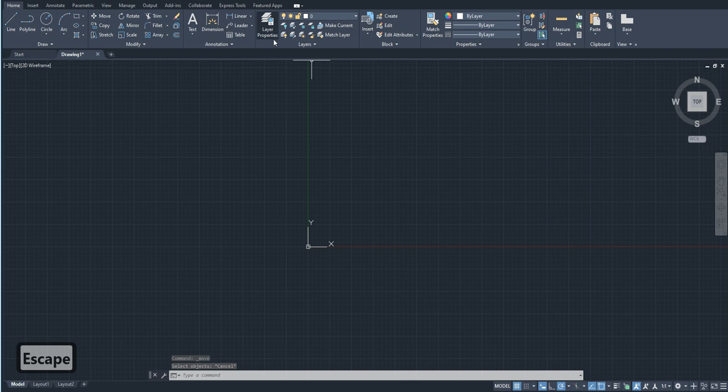To show you the first command, Move, I'll just create a random object on screen. Say I have this object and I want to move it. What you can do is select this command from here, or enter the command using the keyboard: Move. It's asking me to select the objects. I select them and press Enter or spacebar.

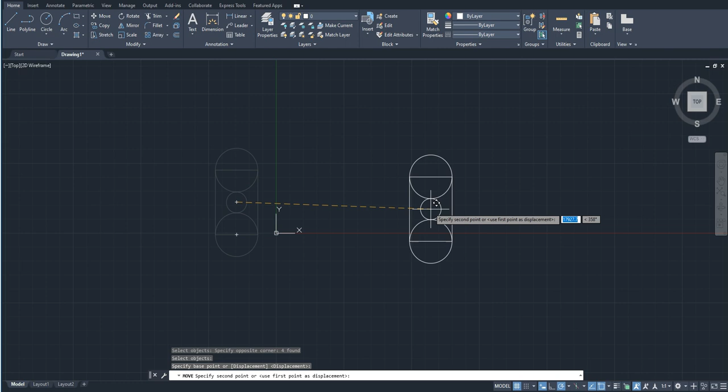AutoCAD assigns a similar function to spacebar and enter, so you can use either. I personally prefer the spacebar, so I press spacebar and it's asking me to specify the base point. Say I specify the base point as the center of this whole figure, and I can move the object wherever I want. So this is the command Move.

Just press Escape to end the command.

The next is the command Copy. It's pretty similar to Move. I select it from here, or enter it, select the objects, press Enter, and specify the base point. The only difference between Move and Copy is that Copy retains the original object, so you can copy this object as many times as you want.

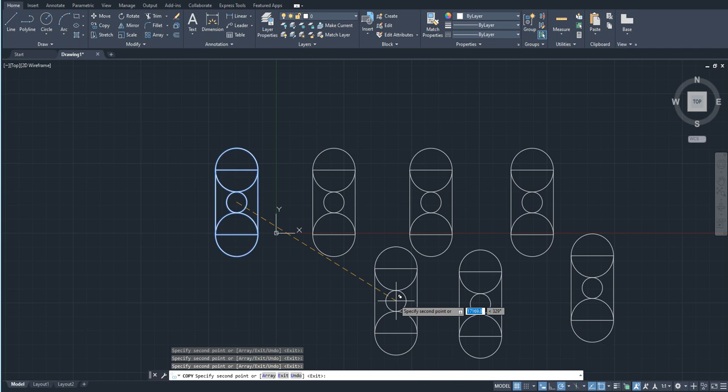I'm just going to press Ctrl+Z. Now I'm going to show you another use of the Copy command. I activate the Copy command again, select this object, and press Enter.

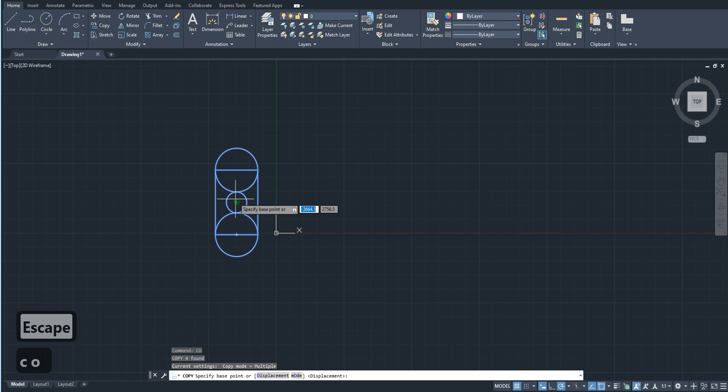And I'm going to show you the command Array. First, I'm going to specify the base point. I'm sorry, I messed that up. I'll use the command Copy and specify the base point. Now I'm going to start the command Array. It's asking me: copy, specify second point, or array.

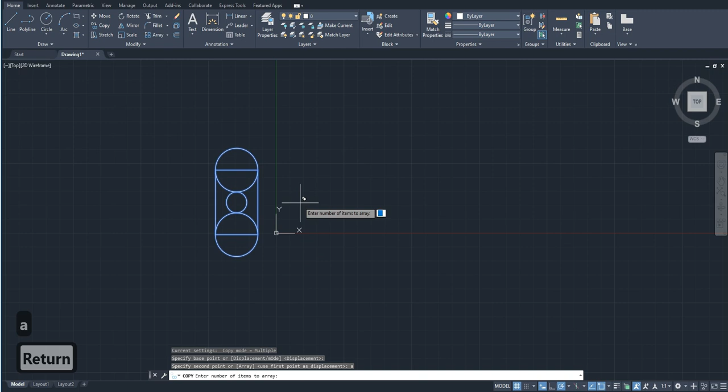So I'm going to show you what this Array command means. For that, I just press Enter. It's asking me the number of items to array. Suppose I want 5 different copies of this particular object. I'm going to enter the number 5.

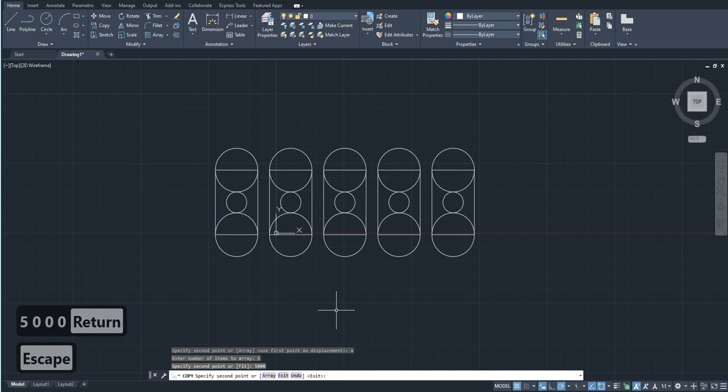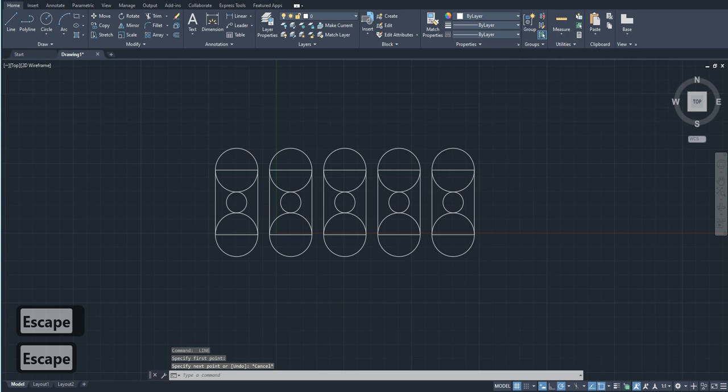So you see 5 different objects have appeared. The fascinating thing is that the distance between these objects remains the same, which I can enter manually as, say, 5000. So we have the copy of the same object 5 times, equally distanced as 5000. You see the distances between the base points - for example, between these were the 2 base points of the object, so the distance between the base points is 5000, not the distance between the lines. That's how the Array command works in Copy.

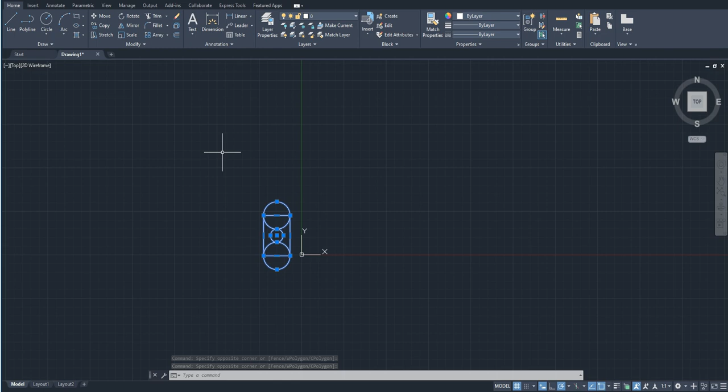The next thing I'm going to teach you is the command Rotate. You can either select the object first and then select the command, or select the command and then select the object - it works either way. So I selected the objects first which I want to rotate, then clicked the Rotate command.

It's asking me to specify the base point, say this, and you see I can rotate this object however I want. Say I rotated it to this. Now I want to make it horizontal again. Of course I can use Ctrl+Z, but suppose I want to make this particular line horizontal in this object - how do I do that?

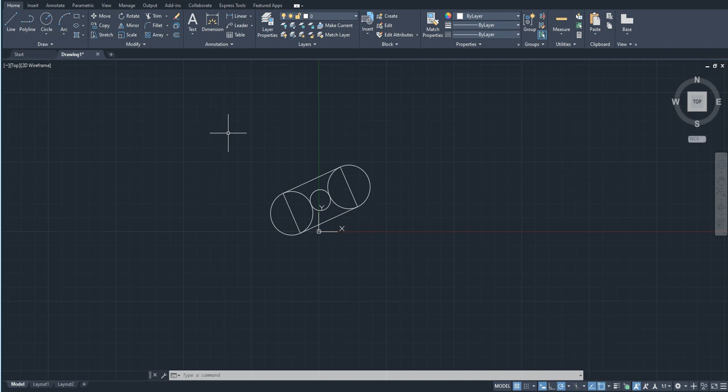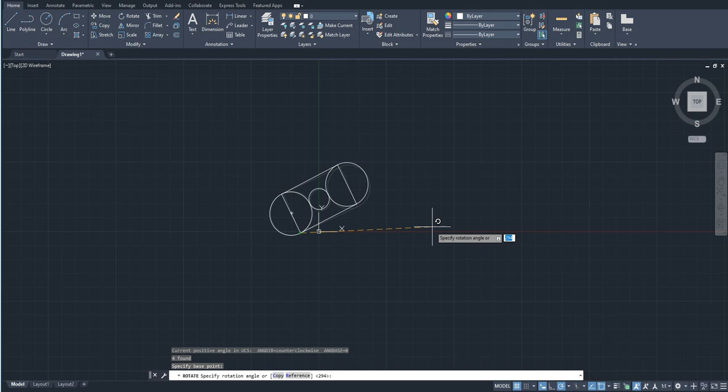Using the command Rotate, I select this, enter the command Rotate, select this base point. You see, no matter how hard I try, the polar tracking isn't working, because this object is rotated on a different axis. So now I'm just going to have to enter a reference line.

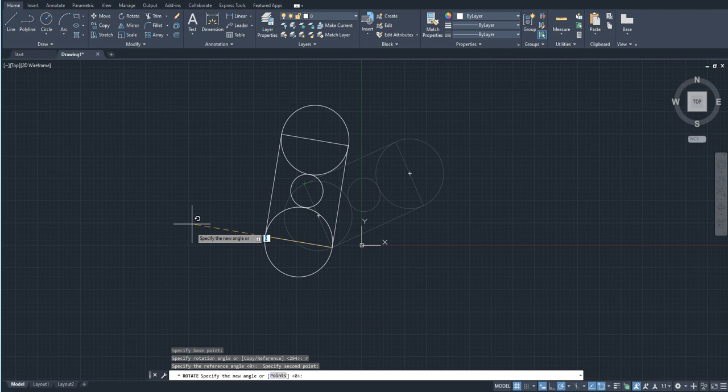For that, you just press R and press Enter. It's asking me to specify a reference angle. Say I specify the reference angle as this. Now I can rotate my object according to this line, and now we have the object finally horizontal. That's how the Rotate command works.

The next command I'm going to show you is the Offset command.

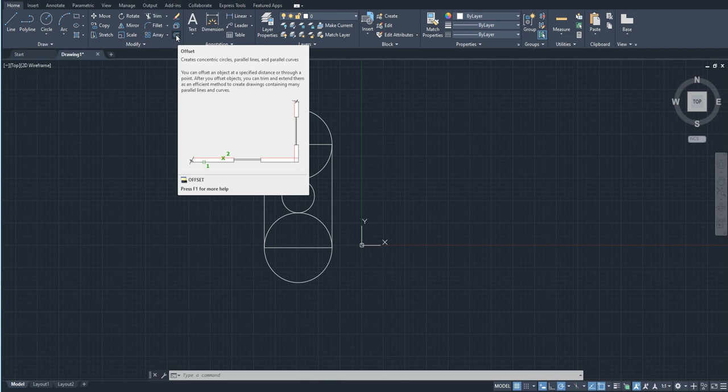The offset command is this small icon over here. This is my favorite command, I use it a lot. It helps to create concentric circles, parallel lines, and parallel curves.

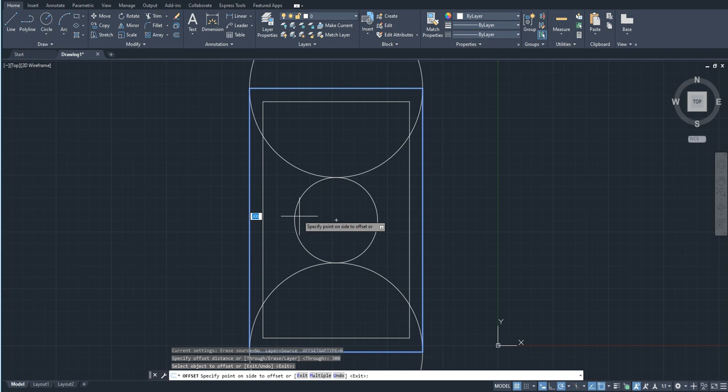So I'm just going to select this, and it helps to create an offset. Say I want a similar rectangle inside this rectangle at a distance of say 300. So I specify the offset distance as 300 and press enter. Now if I select this object and hover my mouse inside this, another object appears at a distance of 300 from the original one.

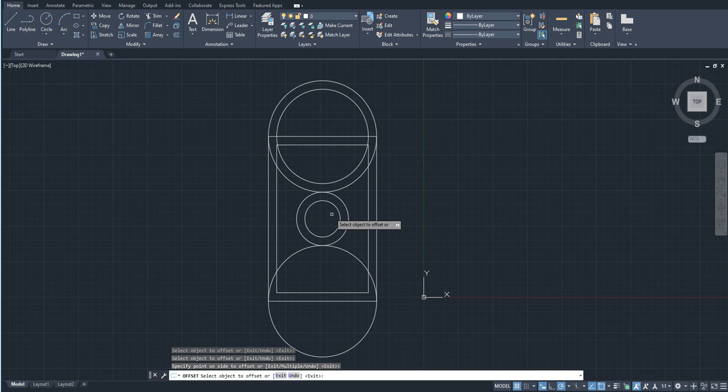And if I hover the mouse outside this object, it's going to offset towards the outside. So I can offset rectangles, circles, and basically anything. I can even offset lines, for example this particular line. If I use the offset command on this, we can also offset lines over here. I can offset it as many times as I want.

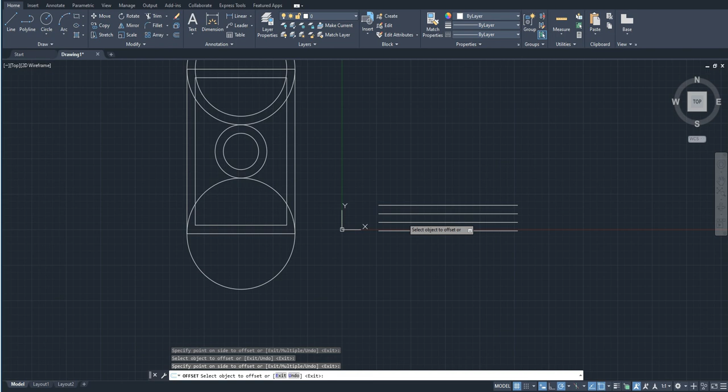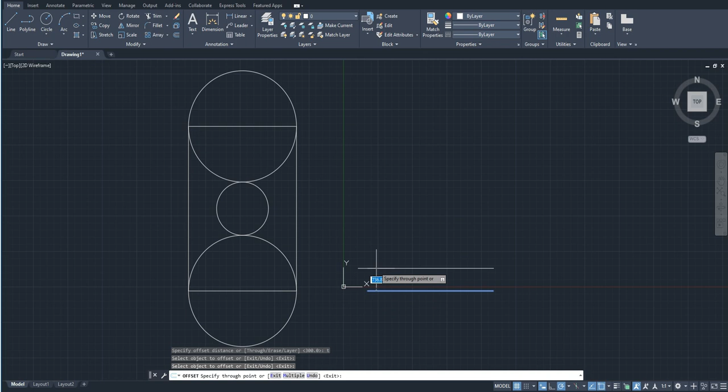The second thing I'm going to show you about the offset command is the 'through' option. For example, I have a line parallel to this particular line, and I enter the offset command, and specify the offset distance as 'through'. For that, I just enter T, enter, and it asks me to specify the object, say this. Now I can select the object and specify the distance on my own, like this. So this is another use of the offset command, called through. That's all about the offset command.

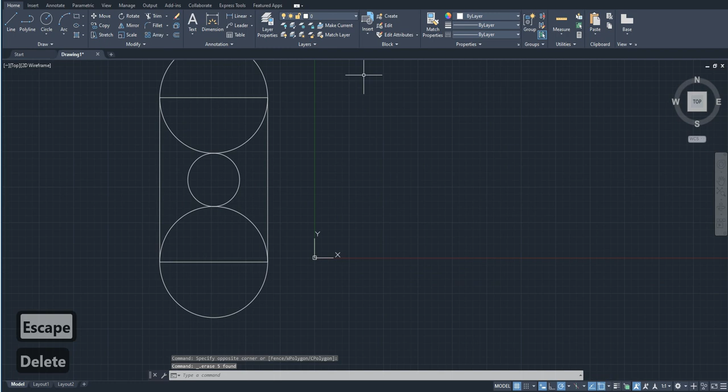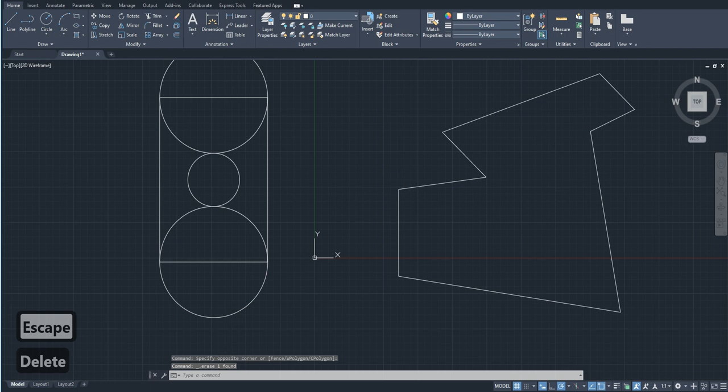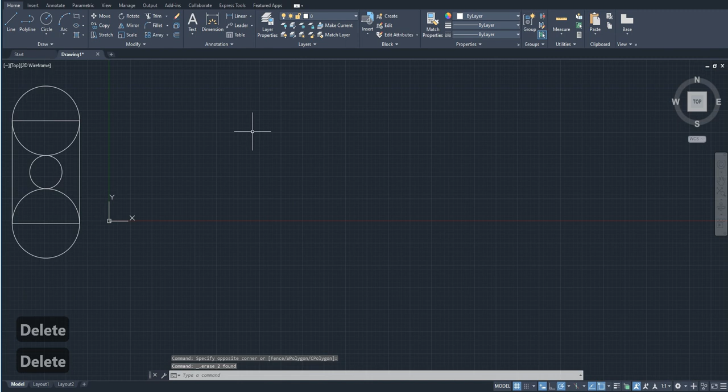The next thing I'm going to tell you about is polylines. We already discussed polylines, I just entered the command for that, PLINE. The offset command also works for polylines, and likewise it works for basically any object. But say this line is not a polyline, these are different lines. For example, I make a similar shape using lines, and then try to offset this - I'm going to have to offset it one by one. So make sure that whatever object you're offsetting, if you want the complete offset of that object, it has to be a polyline or one singular object. That's only when the offset command works that way.

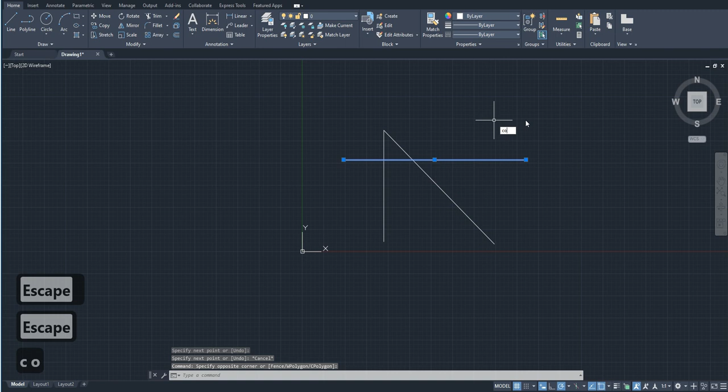The next thing I'm going to show you is the command trim. Let me just draw a figure. Let's say I want to trim these 3 lines, and I'm going to do it in one go instead of selecting this, then clicking this point, end point, and putting it here - that would be a tedious process. So instead I'm just going to use the command trim. For that you can either click the command trim, or just enter TR, enter.

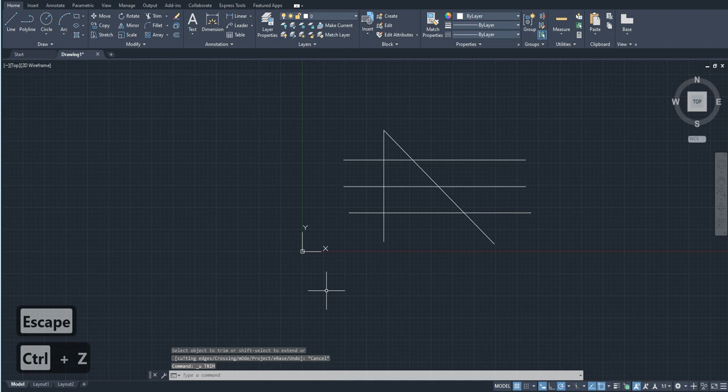Now my version of AutoCAD is AutoCAD 2022. If you're using versions below 2021, you're going to just have to wait a little bit. For people using AutoCAD 2021 and above, they can simply trim this using these commands - you can hover over the lines and it's going to trim them for you. For people using AutoCAD below 2021, don't fret, I'm just going to enter the command TR, enter. For previous versions, if you just enter T, enter, that's how they work.

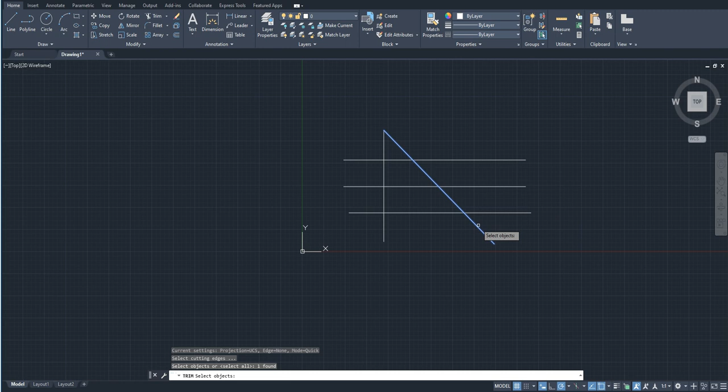If you just enter the trim command, it's going to work like this. Say you're going to have to select this object and these objects - the object from which you want to trim, and the objects you want to trim. So I'm just going to select these 3 objects, press spacebar again, and then trim these objects. That's how trim in earlier AutoCAD versions works.

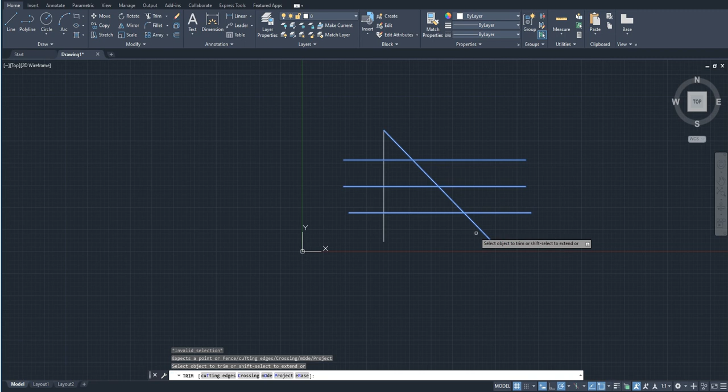But I'm going to show you another useful thing the earlier version has. For example, I want to trim these particular lines over here, not these lines but the whole line. So I'm going to select the line from which I have to trim and the lines which are to be trimmed - I'm not going to select this particular line. Now I just use this command, and you see, I don't have to trim this side and this side separately - it just trimmed the whole thing on its own, and didn't consider this particular line while trimming. That's the advantage of previous versions. So that's how the trim command works.

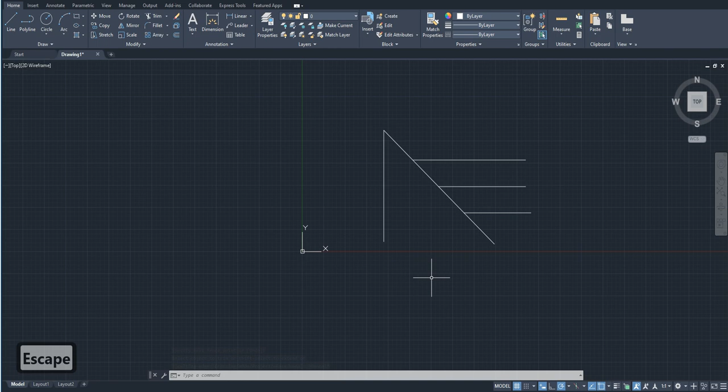The second thing I'm going to teach you is the command extend. For that you just select this, or use the command extend from here. It's asking me to select the objects to extend. I select these objects and extend them to this particular line. That's how the command extend works.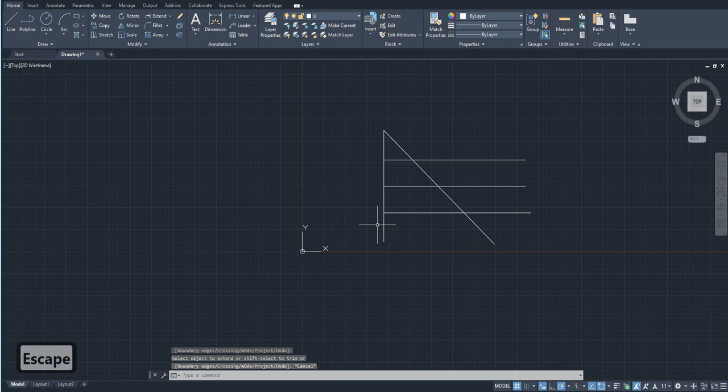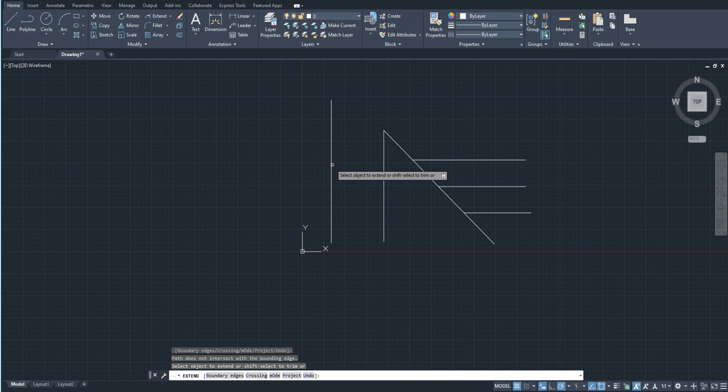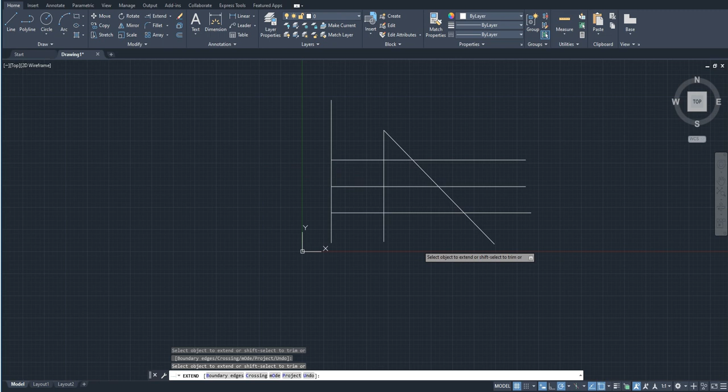I'm just going to press Ctrl+Z to show you another application. Suppose I want these lines to extend till over here. For that I select these lines, use the command extend, and select the object. I select these lines, use the command extend, and select the object like this while double pressing it. So that's for the trim, and that's how the extend command works.

I think it's fairly easy. The next command I'm going to teach you is the command mirror. For that I'm just going to draw a random object, which is a rectangle, and another rectangle and a line.

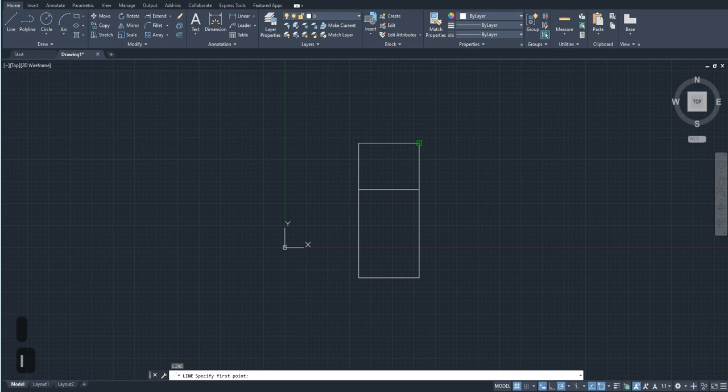Say I have this particular object and I want a symmetrical copy of this object. I don't want a copy, I want a symmetrical copy, basically a mirror image of this object. For that I just have to select this object and click on the command mirror over here. It's asking me to specify the first point of the mirror line.

Now if you remember, when you're standing, say, 5 centimeters away from the mirror, the distance of your reflection from you is going to be 10 centimeters. So if I want the distance between this object and its mirror object to be, say, 5 units, the distance of the mirror line has to be 2.5 from here.

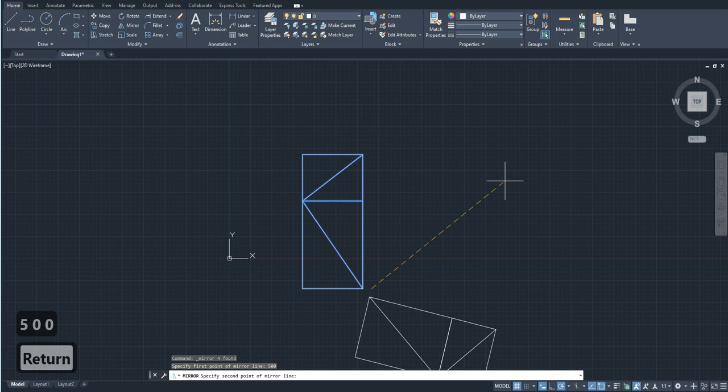Say I want the distance to be 1,000 units, the distance of the mirror line from this object has to be 500 units. So for that, I'm just going to hover my mouse over this area and type 500, press enter, and you see the mirror line can be in different directions. It's going in all sorts of different directions.

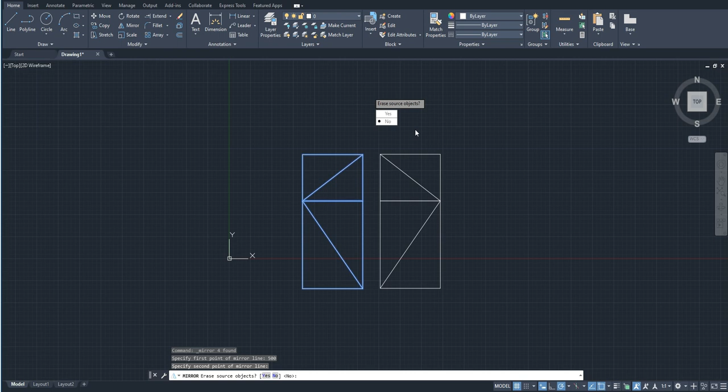I want it to be vertical like this, and it's asking me whether to erase the source objects. I just press enter because no has already been selected by default. So I just press enter, and that's how the command mirror works. So you just have to imagine that you're placing a mirror in front of an object.

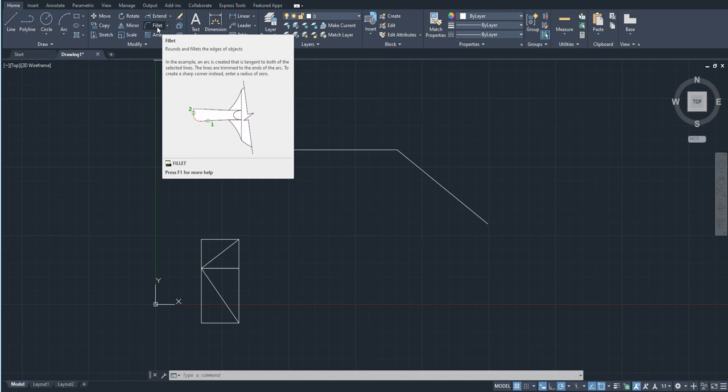The second thing that I'm going to be teaching you is the command fillet. So for that, I'm going to be drawing two different objects. For example, this particular line. I'll just show you what the command fillet does. Fillet rounds and fillets the edges of objects. So it's basically going to change the edge of the object to a round thing.

So I'll just select this command. It's asking me to select the first object, and it's asking me to select the second object. If I zoom in, you can see it did nothing, but that doesn't mean the command didn't work. It's basically because we didn't enter any radius while filleting the object.

So if I use the command fillet again, select my first object, and you can see over here, select second object or radius. If I just enter the radius to be, say, 500, and then I select my second object, you see a curve has appeared over here.

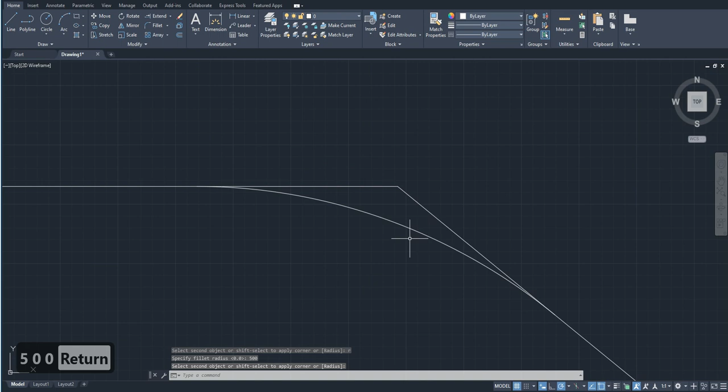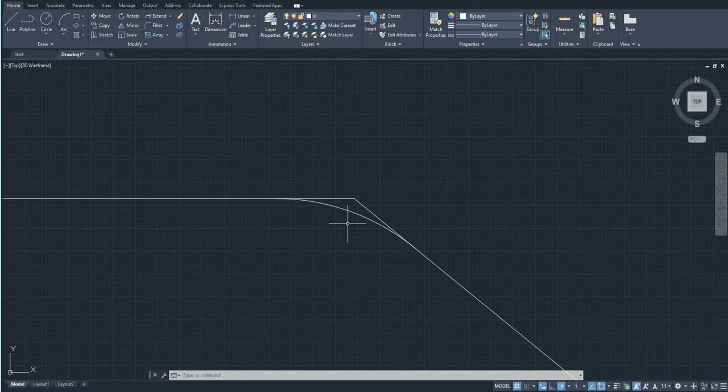Now suppose while creating this curved object, I wanted this particular line to be gone. I only wanted the edges of this object to be rounded. So for that, I'm going to erase this particular arc, and I enter the command fillet again. This time you can see that there are 4 different options over here: polyline, radius, trim, and multiple. For now, I'm going to use trim.

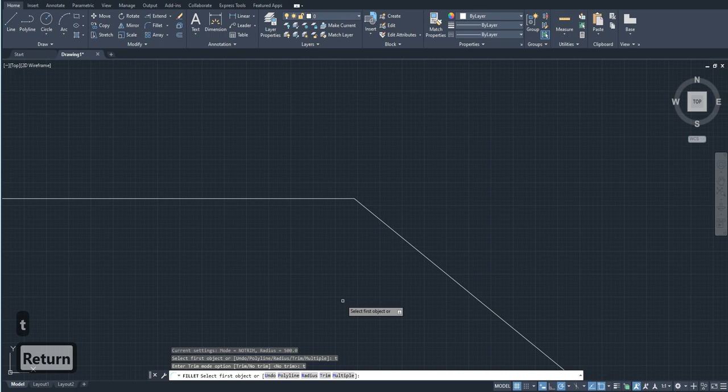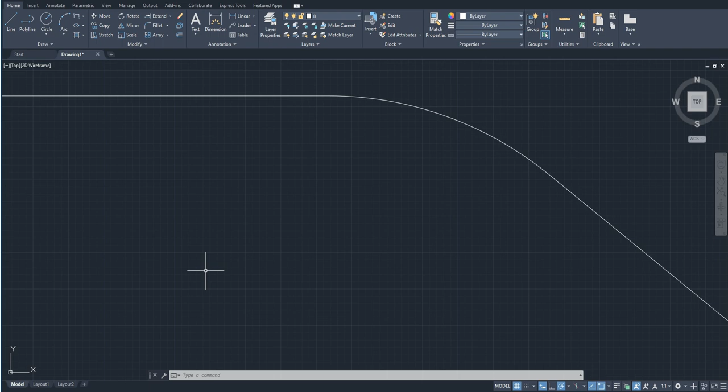So it's asking me to enter trim mode. If I enter T and enter, let's see what that does. I select the first object and I select the second object. You see the corner that was appearing, it's gone now. So that's how the trim command works. Some people may already have no trim activated. So just press Ctrl+Z again, and I'll show you other things of the fillet command.

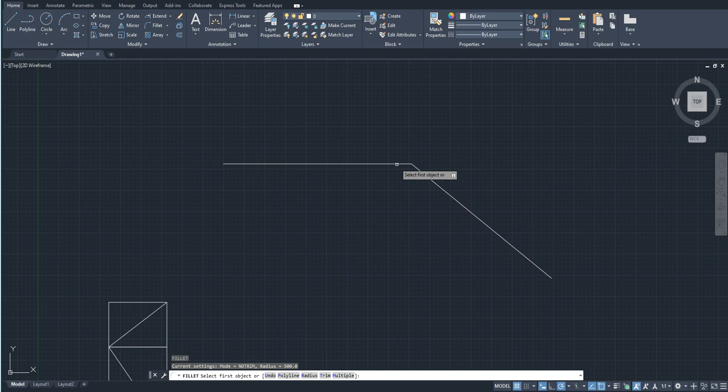I just enter F, enter, and it's asking me multiple. Say I have this particular corner and I have these corners. I want to change the shape of all these corners. So I just enter M, enter, and I select these objects. I keep selecting them and they're going to change their corners.

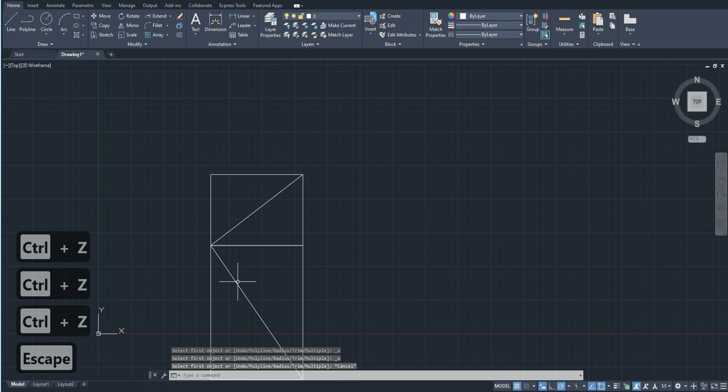But to do this very quickly, I had this as a polyline. This particular thing is a polyline, and so is this particular object. So to do this a bit quickly, I'm going to enter fillet, and this time I'm going to use polyline. So if I just select the polyline, that's what it's going to do. It just created corners over this polyline.

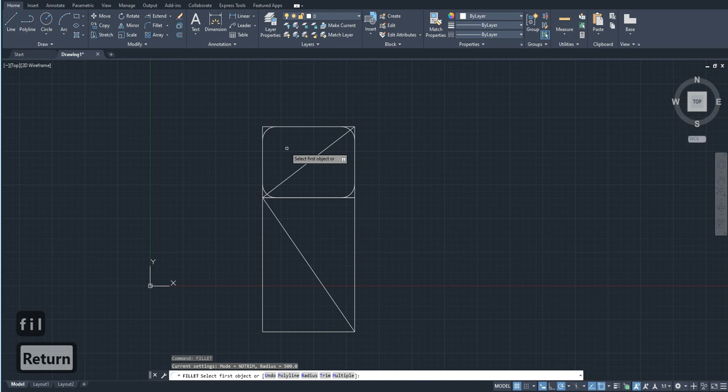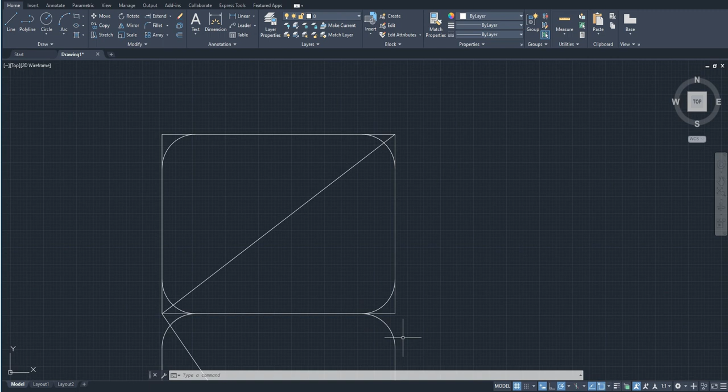Well, if I have the trim command activated in this, T enter, trim, and I activate polyline after that, if I select this, all of this is going to be a polyline. Even the corners, the rounded arcs, have become a polyline. Instead, if we have no trim activated, the arcs are different and this line is different. So I hope you understood what the fillet command does.

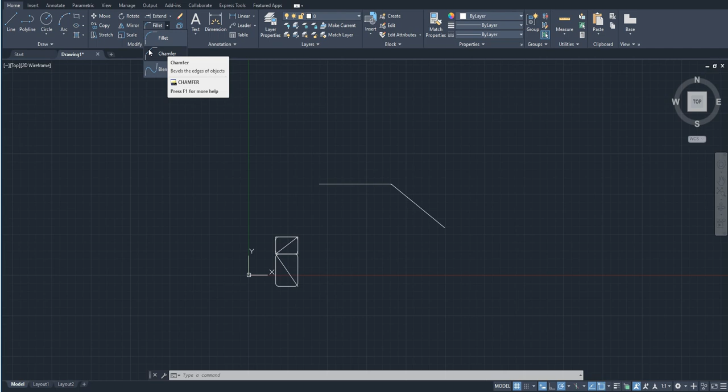Next, I'm going to be showing you the chamfer command. The fillet command is similar to the chamfer command. In fillet, we have kind of an arc instead of a corner. In chamfer, there's a line instead of a corner. I'm just going to be showing you that. For that, I'm going to have to delete all these lines.

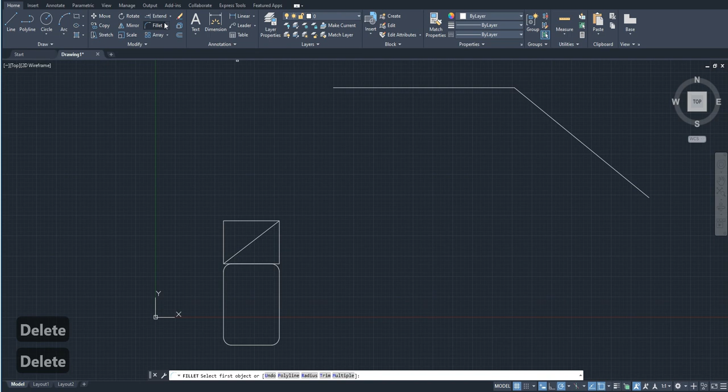So if I just use the chamfer command, the shortcut for chamfer is CHA. It's asking me to select the first line and it's asking me to select the second line. Again, it did nothing because we didn't choose any chamfer distance. So I'm just going to select this command again, select the first line, enter the distance, D, enter.

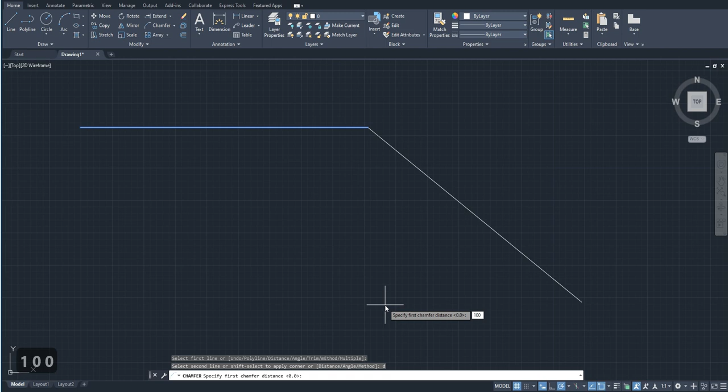It's asking me to specify the first chamfer distance. I'm going to specify it as 100, enter. The second chamfer distance I'll specify as 500 and enter. And if I just select the second line now, you see that a small line is appearing over here. Here the distance of this particular thing is 100 and this particular thing is 500. So this is how the chamfer command works.

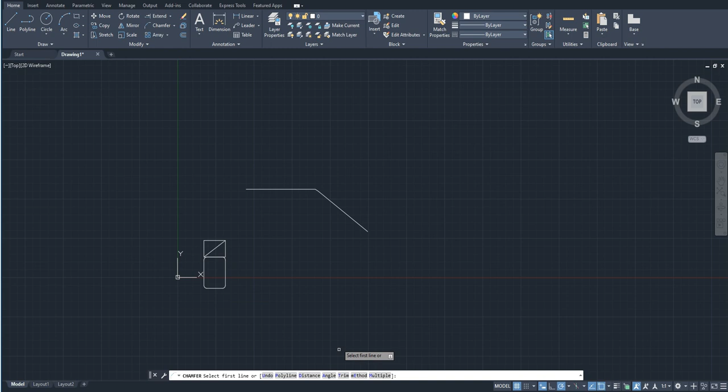If I just enter the chamfer command again, you can see it has similar options as that of the command fillet. It works in a similar way. I hope you just practice on your own and understand how these commands work. Except what you have over here is the angle. So over here I specified the distance initially. I can also specify the chamfer command using the angle. If I just press A, enter,

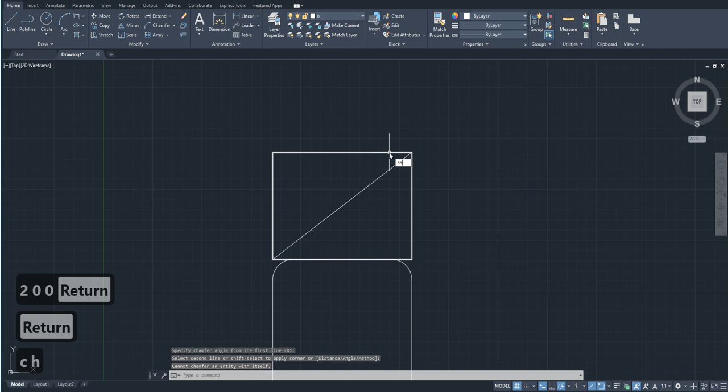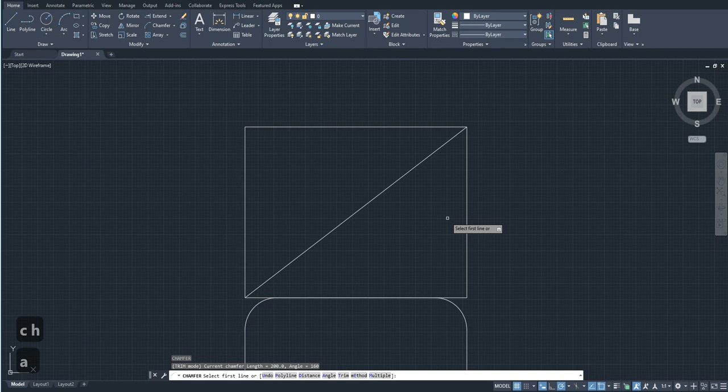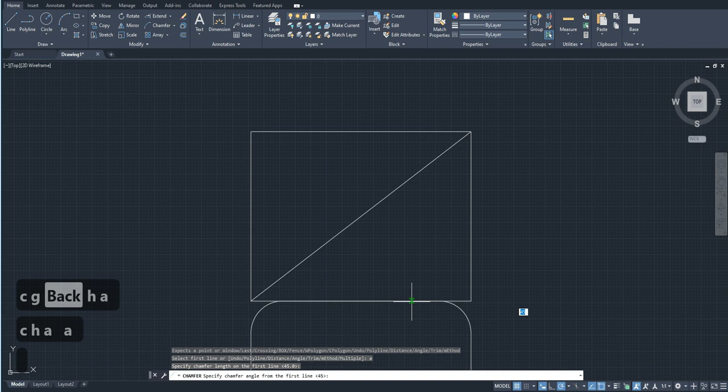Now if I enter the chamfer command again and select my first line and enter the angle, say I select 45 degrees for the first one and 45 degrees for the second line, you can see it's selected 45 and the second angle is also 45. So just press enter and select this. You see it's chamfered at an angle of 45 degrees. The angle from here to here is 45 and the angle from here to here is also 45.

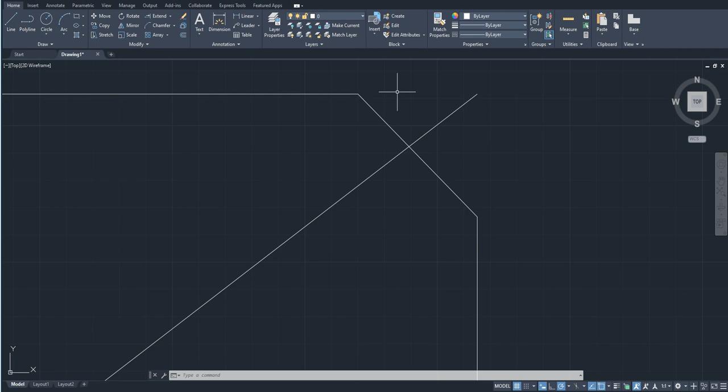So you must make sure that if you have this particular angle, say 90, the other two angles should also add up to 90. So basically I'm not here to teach you maths. You can understand those angles by yourself. The 45 angle is basically the angle between this imaginary line and this line, the chamfer angle. So that's how the command chamfer works.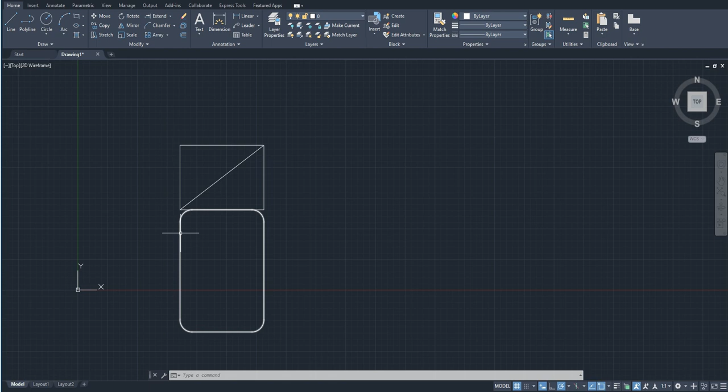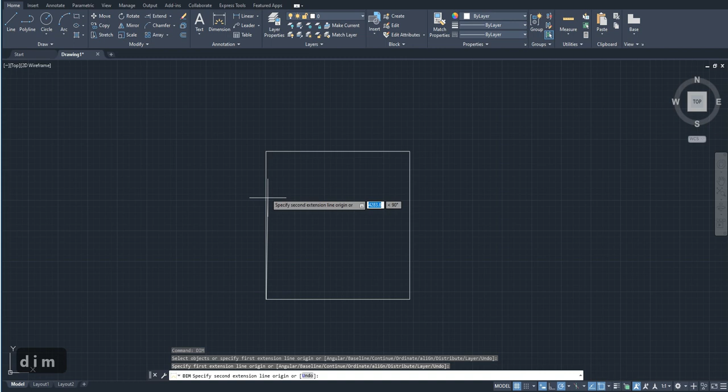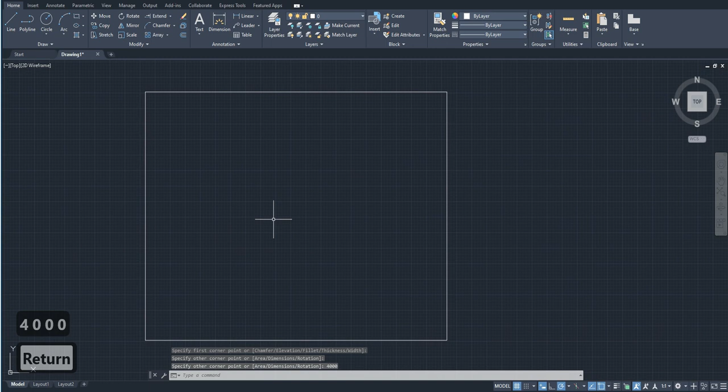The final command in this video that I'm going to be showing you is the command scale. The scale command is a pretty widely used command. For example, I'm just going to delete this and make a new object over here. I make this rectangle over here. We have random dimensions, so I'm just going to enter a rectangle with specific dimensions this time. Say 5000 by 4000. So over here we have a rectangle with the dimensions 5000 by 4000.

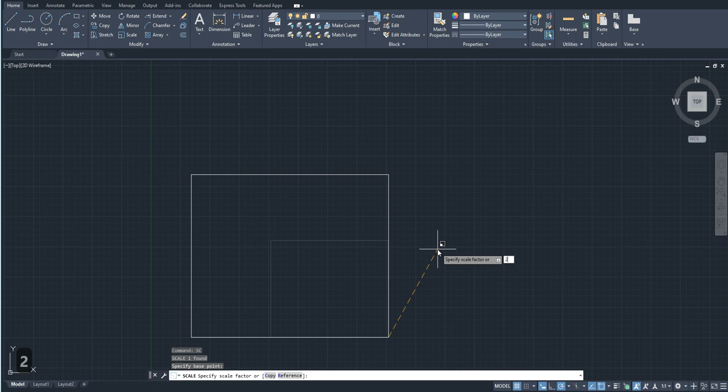So say we want to scale it to a different size. To activate the command scale, you just have to select the object, enter SC, enter. It's asking me to select the base point. That's going to be this, and you see that the rectangle is changing size. Presently the scale factor is coming to be 1.4, but I want a scale factor which is exactly 2. That means the rectangle is going to be 2 times its original size. I'm just going to press 2 and enter. So the rectangle has been scaled to twice the size.

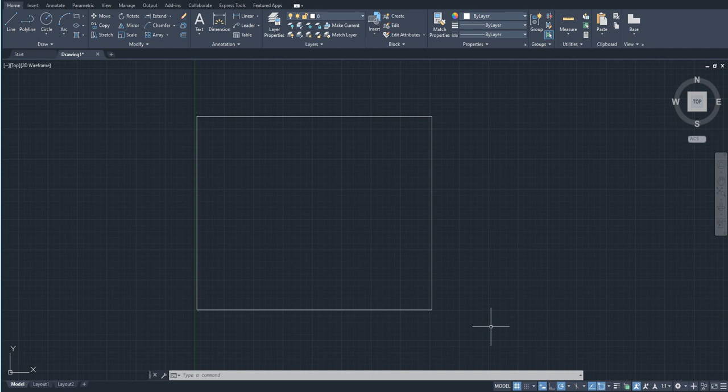The next property of the scale command would be, suppose I have this rectangle and I want to scale it, and I specify the base point as this. Now you can see that I have an option of reference here. So if I enter R, enter, it's asking me to specify the reference length. Suppose I want to change the dimension of this particular line to say 200, and I want to scale the entire object according to that. I don't want to calculate the scale factor, so I'll just use the reference length.

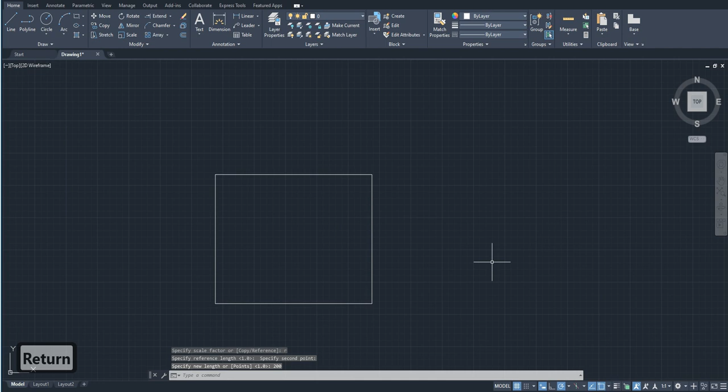So I want this particular length to be 200. I select this, it's asking me to specify new length. Now I want this length to be 200, and I press enter. So the whole object is scaled according to that particular length now. So that's how the scale command works.

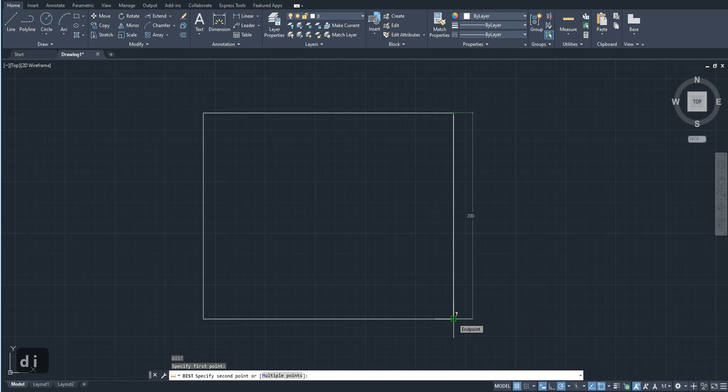If you want to know that you scaled this object perfectly, you just enter the command DI. It is the command for distance. This line is now 200 and this line is now 250. So the whole object is scaled according to what you wanted. So I guess that's it for this video.

I hope you understood. I know we struggled a bit in the chamfer command, but I hope you finally understood how the chamfer command works.